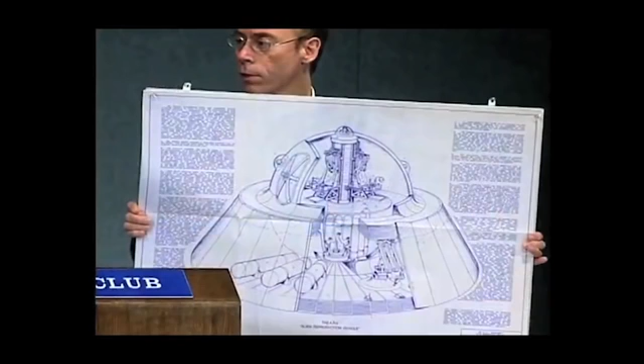He'd spent over a decade in research and development on the main focus of the NPC event, technologies connected to UFOs and extraterrestrial vehicles. His detailed technical illustration of a purportedly reverse-engineered alien craft, the Flux Liner, a strange flying disc shown at a secret US Air Force air show in 1988, was a highlight of the conference.

These discs were hovering off the floor without any visible means of support. They were referred to as alien reproduction vehicles, also nicknamed the Flux Liner because they used high voltage electricity.

This is a diagram that I made based on a sketch that Brad Sorensen did for me in rough form, and subsequently cleaned that drawing up and made it much more accurate.

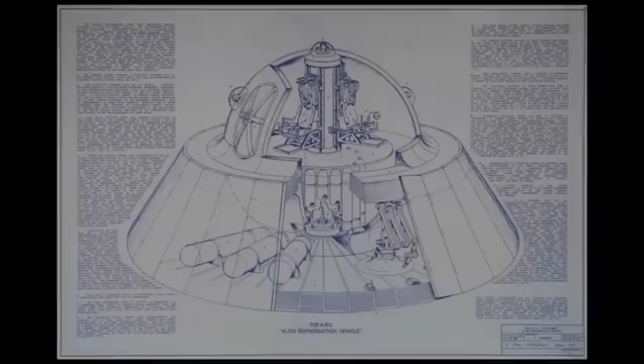This is his story. He says, you know, I gave you the basic verbal description of what I saw. He says, but somehow or other you've taken everything, all the information I gave you, and you have graphically interpreted it into an image that is so close and so accurate. He said, this is really dangerous stuff here.

Deanne Divis with United Press International: Could you please address the vehicle that there was a drawing displayed of? Why would this vehicle be on display at an air show? What is the power source that you are asserting is going to be so very useful? And how can you determine that this vehicle is not something that is being developed by a government agency?

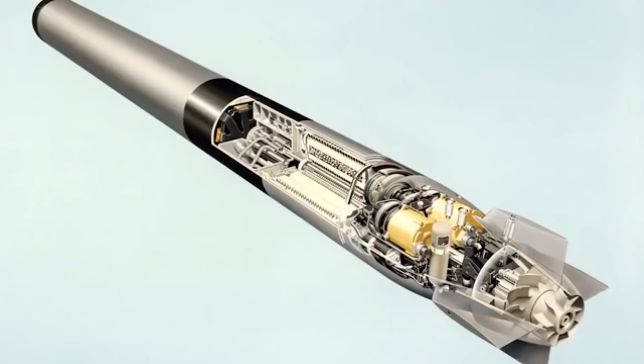Worked on some conceptual artwork showing cutaways of some of the weapon systems and how the components inside those weapon systems interrelated to one another.

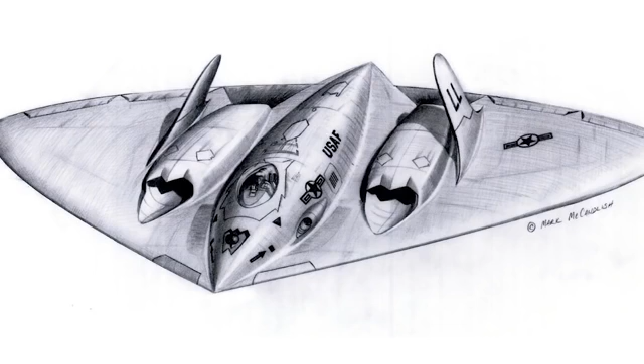I was given a lot of information. Many times I was asked to create illustrations for clients based on just verbal descriptions of what they wanted to see, because a lot of it was conceptual artwork that was supposed to put across the idea that, say, a particular aircraft they were designing was going to be extremely fast, so it had to have all the dynamic characteristics of what a really fast aircraft would have. I had an idea of what these things looked like, so I was subscribing to some of the trade publications available at that time, like Aviation Week and Space Technology, and knew a lot of people at the magazines, test pilots, editors, and things.

By the mid-1980s, he was a very successful professional artist living in Rialto, California. He had a full slate of high-profile projects and had become a very sought-after and respected talent in a very crowded field of designers and artists. Despite living in the era of Reagan and disco, things were going very well for Mark.

Then, in the autumn of 1988, things took a turn for the weird.

Well, it turns out that this was in October that the magazine hit the newsstand. It was a November issue of Popular Science. It was called the Mach 5 Spy Plane.

And a friend of mine from college, Brad, had seen this cover illustration and had opened it up to read the story, and he recognized my name, and he called the art director. He passed along my phone number, and the next thing you know, I get a phone call, and this fellow calls up and says, 'Hi Mark, it's Brad, remember me?' And I said, 'Yeah, we were in the transportation design curriculum at Arts Center in Pasadena when we studied car design.' So we got reacquainted, had lunch together, and it turned out that just a few weeks beyond that,

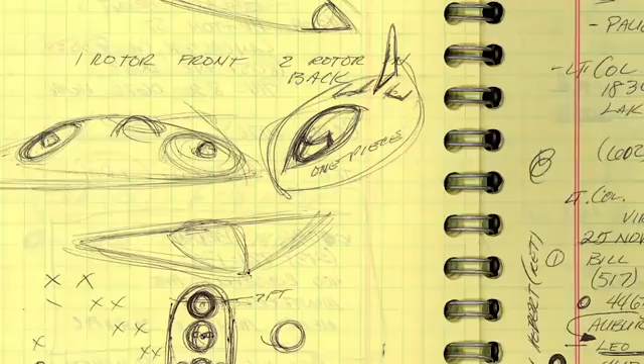Of course I was curious about what it looked like, and he gave me some details on that. Then he described a number of odd-looking hovercraft and troop transporters - basically jazzed up, advanced hover vehicles of one kind or another. After going through all this, I said, 'Well, even this doesn't sound all that extraordinary. Is there something else?' And he says, 'Well, yeah.'

He says after the main little dog and pony show, they pulled back the curtain, and there were these three flying saucers hovering there. I couldn't believe my ears. I said, 'No, wait, did you say flying saucers?' He said, 'Yes.' And I said, 'Well, what do they look like?'

He says, 'Well, it was just - it looked like something from the 1950s, like a jello bowl, flat on the bottom, sloping sides, a little terrace around the middle, then a dome on top with all these little bubbles around it, and a door that looked like something off of a submarine, with little pins that go out into the frame of the door, and the big wheel you turn to tighten it, all this kind of stuff.'

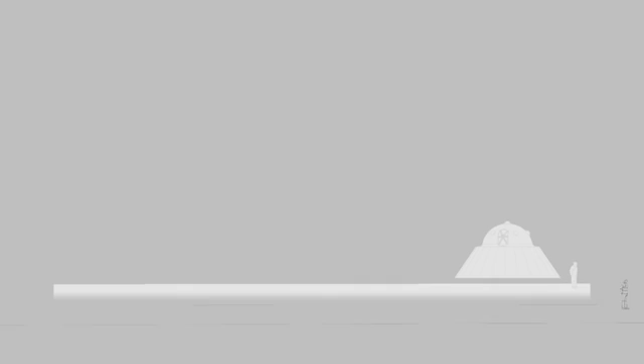The smallest one was about 24 feet in diameter at the bottom end of the craft. The medium-sized vehicle was about 60 feet in diameter, and the largest was somewhere between 125 and 130 feet in diameter. I said, 'Well, what were they doing, were they just sitting on the floor?' He says, 'No, they were hovering - there was no landing gear, nothing holding them up, no cables, they were just hovering.'

There was a 3-star general that was part of the presentation. When they pulled back the curtains and these three flying saucers were revealed to the audience that had been brought there to this hangar, this general got up and he was describing these vehicles.

He described them as alien reproduction vehicles, ARV for short. They also had a nickname for the aircraft - they called them flux liners. Now flux is an electrical term for a high electrical charge, so a high electrical charge liner, a flux liner. At that point he got kind of scared and stopped talking.

So I said, well, let's have lunch. He was nervous about talking about it on the phone, so I go over there and we start talking. And as he's describing this stuff, he's describing the different features that he had seen.

And I said, how do you know that? If you could just look at the outside of the vehicle, how do you know what the inner workings is? He says, well, they had taken some of the panels off the outside so you could see the inside, what the components looked like. And he said it was remarkably simple. There wasn't that much to it.

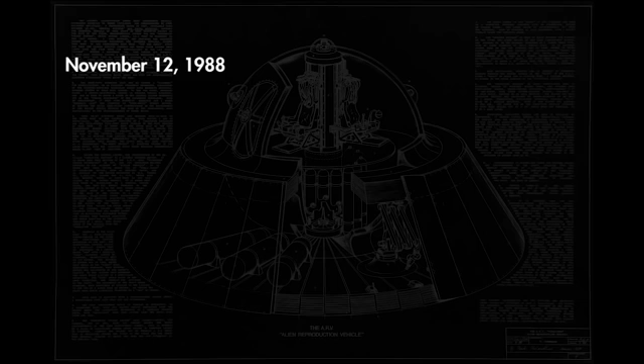According to his account, on November 12, 1988, Mark's friend inadvertently gained access to a highly classified airshow where the featured hardware was real flying saucers. They were really strange looking, but appeared functional, and were named to suggest anti-gravity and reverse-engineered alien technology. An official presenter stated they could travel faster than light. Despite their futuristic performance capabilities, these appeared to be stripped-down, road-worn working prototypes, which had seen practical operation for years.

If this were the case, they were crude but tangible proof of concept for a staggering leap in aviation technology. They used extremely advanced electromagnetic or field propulsion, as opposed to solid or jet fuel, nuclear power, or any other commonly known conventional means. It also meant our government, and at least one other major defense contractor, Lockheed Martin, had been developing and deploying functional systems along these lines for many years.

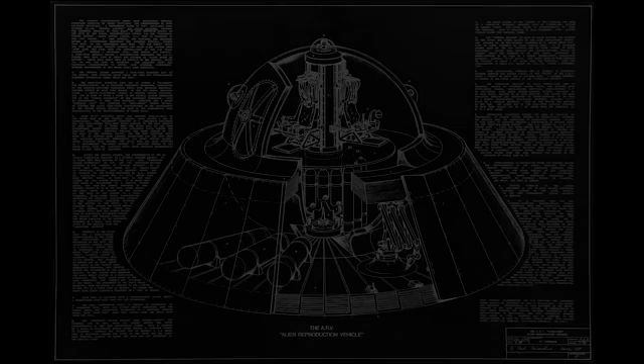To both McCandlish and Brad, who'd been working professionally for some time within what they thought were the highest levels of aeronautical design, this odd system was a sucker punch from the future. This apparently had a really serious impact on Brad, and he seemed kind of stunned by what he had seen.

So we got together for lunch, and I was doing idea sketches of what he described to me about how the components related. And I had your stereotypical sort of lens-shaped flying saucer, like you see in more modern movies and stuff.

And he said, oh no, this is real simple. It's flat on the bottom, sloping sides like a section taken out of a cone, a little ledge, and then a dome on the top. He said the dome is actually the top half of a crew compartment that's like a big ball.

I'm pretty sure that was about 12 feet in diameter. There's a central column that goes down through the middle. There's a flywheel thing on it, maybe 6 to 9 feet in diameter. There's 4 ejection seats that are all back to back on this central column above the flywheel type thing. And he says a bunch of oxygen tanks in there, all around the bottom. And he said the bottom is this huge capacitor array, probably maybe 12 to 14 inches thick.

It was shaved off at an angle on the edges, like it had been put on a big giant milling machine, and they milled off the edges at a 35-degree angle. He said there's a series of these plate capacitors.

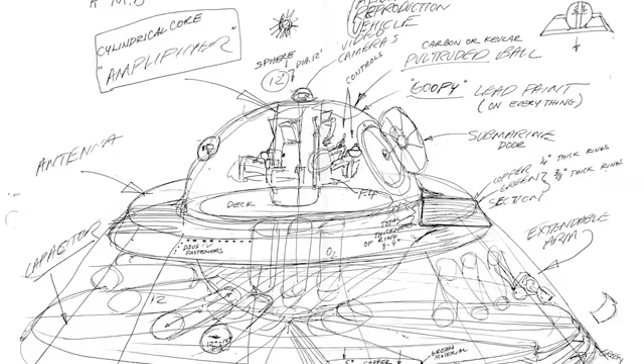He put some little handwritten call-outs around the edges that described the number of capacitor plates in each one of the little sections, that they were so wide at the end, and the crew compartment was definitely about 12 feet in diameter. He just put all these things down as close as he could remember to the way they existed.

And so I sat down with all this information, and I just began sort of drafting it out.

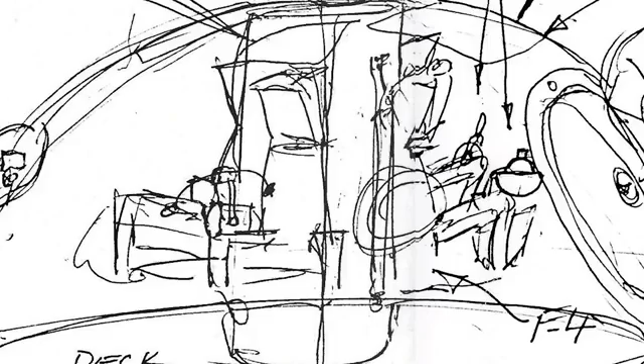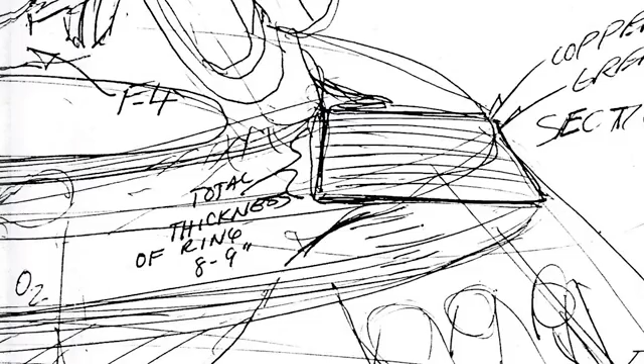It was at this point Mark began putting his formidable skills as a conceptual illustrator to work in uncharted territory. Taking Brad's eyewitness account, detailed descriptions, and rough sketches of the ARV, McCandlish began refining aspects of the components his friend described and piecing together an ever more precise rendition of the craft.

Over the course of the next few years, he generated a series of drawings, culminating in the Fluxliner cutaway blueprint, one of the most notorious images in the history of ufology, and the mysterious realm of black-budget aircraft.

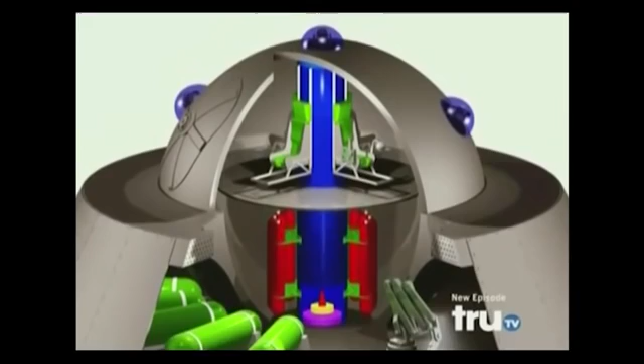This was called the Fluxliner. This is probably the strangest one you've shown me yet. This actually flies? It actually flies on the principles of high voltage electrical charges.

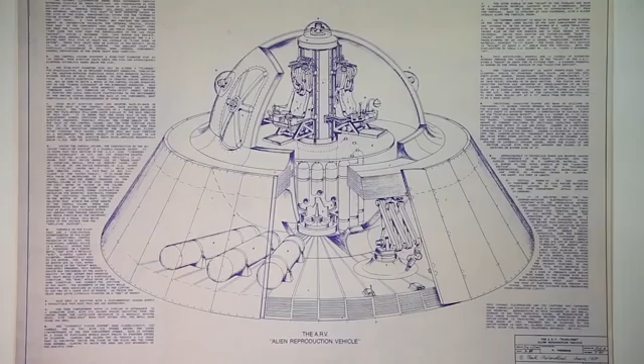This is the original, one of the original blueprints of the alien reproduction vehicle, which I produced in March of 1989. It was put together by accumulating a lot of verbal testimony from Brad and later from a number of other sources, including Kent Sellen and some other people I talked to who had some contact or information about the vehicle.

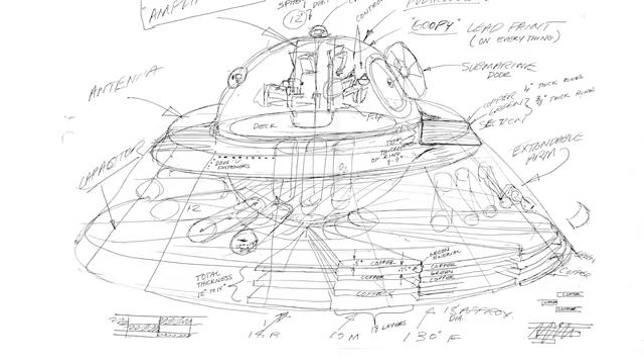For Mark, his friend Brad's initial account was a fascinating story with a degree of veracity and plausibility, worth exploring and doing some research, but was after all just one man's tale of a fairly unbelievable event, concept, and machine.

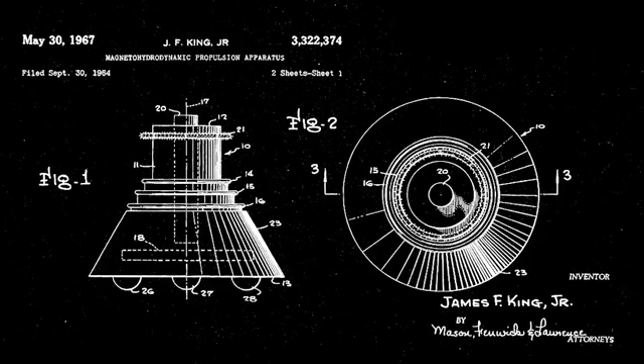However, this subsequent research led Mark to some other very compelling eyewitnesses, official documentation, including numerous scientific patents, and other sources, such as respected quantum physicists, which finally convinced him of the likelihood that the ARV might be a very real thing.

The first verification of the story I picked up on the alien reproduction vehicle was around 1991, 1992. It was the first air show at Edwards Air Force Base where they actually had the B-2 stealth bomber on display. In the course of that air show, I had occasion to join up with some clients from Rockwell International, and they introduced me to this fellow who claimed at the time that he was working with the Air Intelligence Agency. His name was Kent Sellen.

He claimed that he had inadvertently seen this same craft at Edwards Air Force Base North Base facility in 1973. I asked him, when, how, where, what were the circumstances? He said, well, I was a crew chief. I worked on Bill Scott's plane when he was a test pilot. One night my shift supervisor said to me, go out to North Base. They've got a power unit out there, a ground power unit for an aircraft that's leaking or failed or something, so we need to take a tow vehicle out there, go pick it up, bring it back.

Well, instead, what happened is he comes up off the dry lake bed, rolls right up on the tarmac, and is going down these rows of hangars. They're all Quonset-style hangars back then. He stops in front of the first one with the doors cracked, expecting to find this defective ground power unit, and what does he see? He sees this flying saucer sitting in the hangar, hovering off the ground.

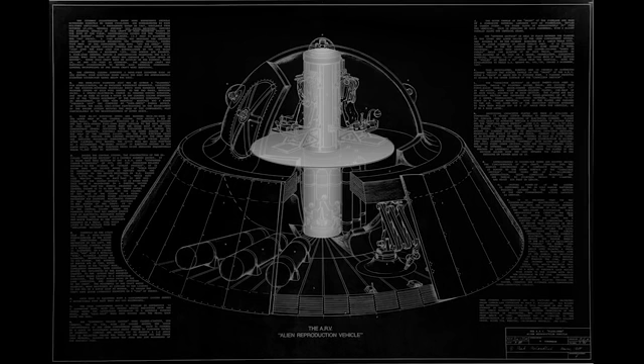Strong and durable must the body of the Vimana be made, like a great flying bird of light material. Inside, one must put the Mercury engine, with its iron heating apparatus underneath. By means of the power latent in the Mercury, which sets the driving whirlwind in motion, a man sitting inside may travel a great distance in the sky.

One of the things that they described when you read up on the literature surrounding these so-called Vimanas was the so-called Mercury vortex or Mercury turbine engine. I see the word Vimana. Can you describe how that relates?

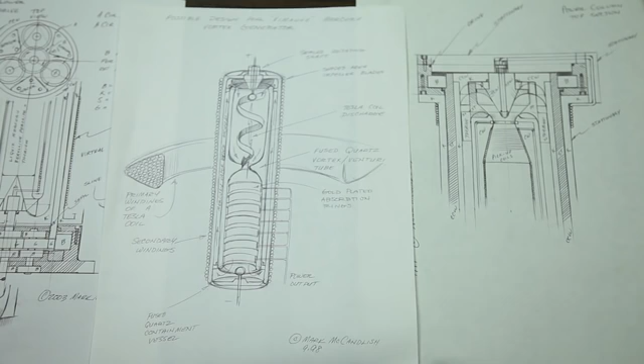Well, this is something that I spent a lot of time reading up about, the so-called Mercury turbine generators or Mercury vortex generators described in some of these ancient Sanskrit texts. I started looking at the possibility that there had to be some kind of circulation going on in the Mercury itself. That's the kind of thing I visualized would be going on inside the chamber. The central column has a number of components, a couple of counter-rotating cylinders.

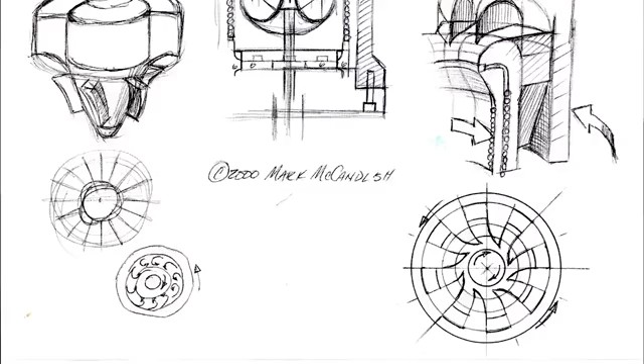It sounds very much like the device that the Nazis were developing in the Wenceslas mine in Poland towards the end of the Second World War. There seems to be some evidence that they were trying to develop some kind of anti-gravity propulsion system or a zero-point energy device. If we're talking about systems using components and processes similar to the ARV, we can't ignore the Nazis. I think it was Timothy Good

who published a story, maybe in Above Top Secret, where he found a researcher who was following developments by the Nazis at the end of the Second World War, and it looked like they'd been developing flying saucers up in Poland in the Wenceslas mine. They had this thing that looked like Stonehenge, with all these high voltage cables coming into it and chains that would hold something down, and they had this thing called the bell, the Das Glocke. Die Glocke. The bell.

That was down in this mine in Wenceslas, and it involved a ceramic dome with two cylinders inside with a mercury solution circulating in it. The two cylinders were inside an electromagnetic field, counter-rotating, with this mixture of mercury, thorium, and beryllium. Now it looks like there's a high-voltage electrical discharge being sent through the mercury, and that is somehow doing something that enables this anti-gravity effect to occur.

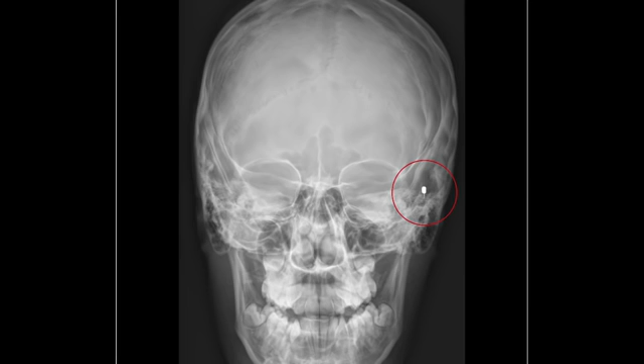So what I did was simply ask them to describe what they saw, and without disclosing anything that I already knew about the components inside the alien reproduction vehicle, I found that these young ladies, at least one of them in particular, was able to describe not only components that strongly resembled the ones inside the alien reproduction vehicle, but they were also at a higher level of sophistication that actually gave additional clues about how the ARV actually functioned.

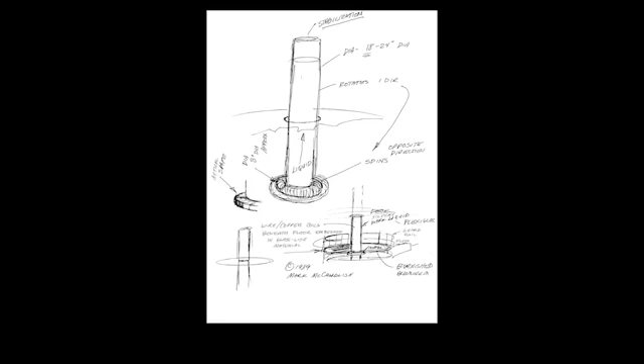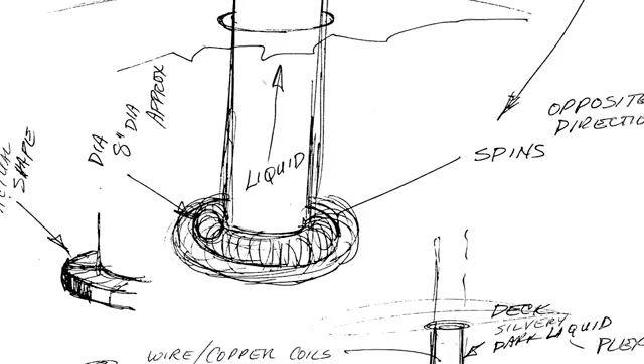Alicia Davidson described being escorted into the engine room and seeing the propulsion system components. It involved a central column made of a transparent glass-like material, with a silvery fluid spiraling upward at the bottom of the column. Down in a well in the center of the spacecraft was a little tiny flywheel-like mechanism spinning, which matched the ARV. This was at a point when she had never seen any of the drawings I'd done of what the ARV was structured like.

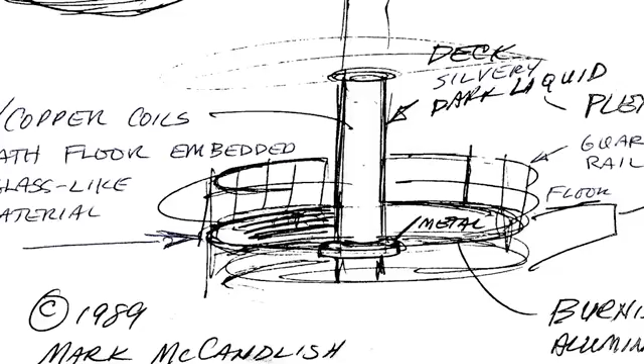I was just talking about propulsion components in general, but she said that when you looked across this little well, this lowered floor area in the center of the room, there was like a guardrail around it. She stood there and said the deck below was this glass-like material with coils of wire going through it, spaced in the same proportions as on the ARV. The most significant thing was that the column itself was rotating in one direction, and the flywheel was spinning in the opposite direction. There was counter-rotation, which is often reported in UFO sightings—components spinning in opposite directions.

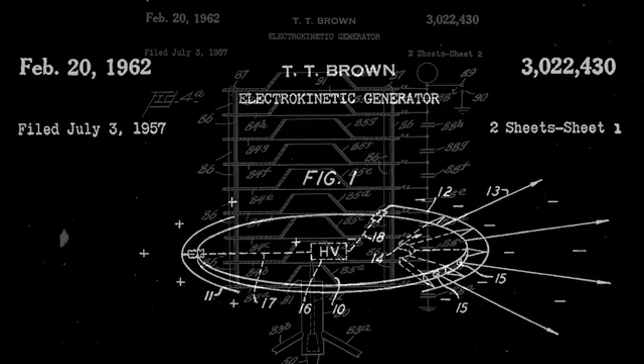Back here on Earth, the scientific community has been busy since the end of the Industrial Revolution. There have been dozens, perhaps hundreds, of US and international patents dealing directly with electrokinetics and electrogravitics, going back to the turn of the last century. It would be safe to assume private industry and the military have also been working on related applications off the public record. In short, since Nikola Tesla's first experiments with pushing electricity around, mankind has had a thing for anti-gravity.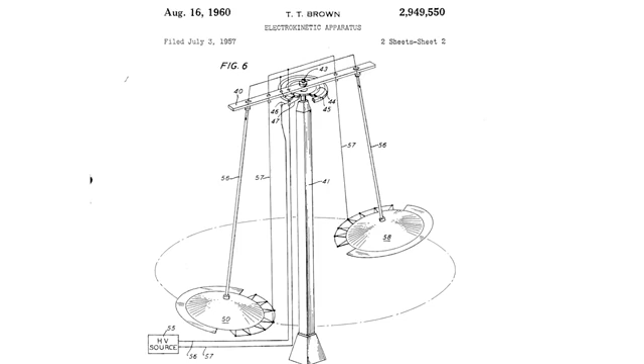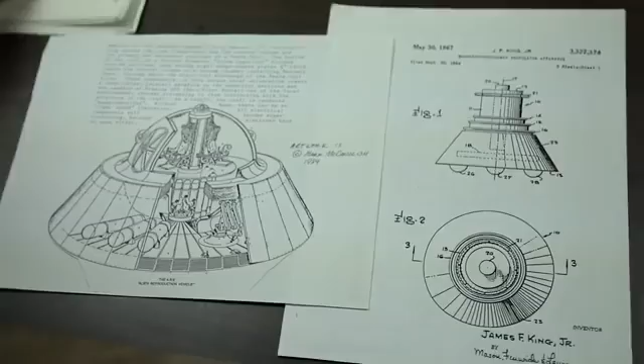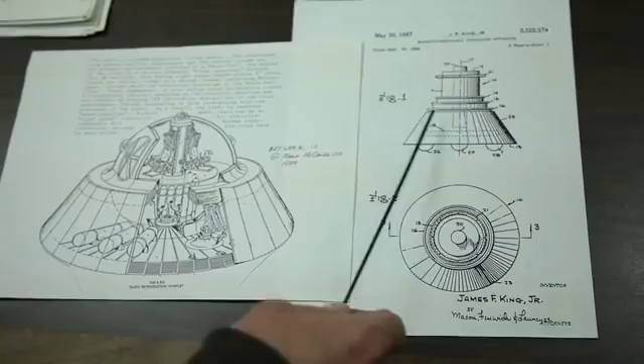If you look at these two illustrations, this is a patent secured on May 30th, 1967 by James Frank King Jr., who worked with Thomas Townsend Brown in the labs of Agnew Bahnson. You can see a striking similarity between the two vehicles: a frustrum-shaped fuselage section, a series of coils wrapping around the crew compartment—though here it's more of a cylinder—a central column going down through the middle, a capacitor section at the bottom, and little flight control mechanisms. I find it remarkable how much similarity there is between the two objects.

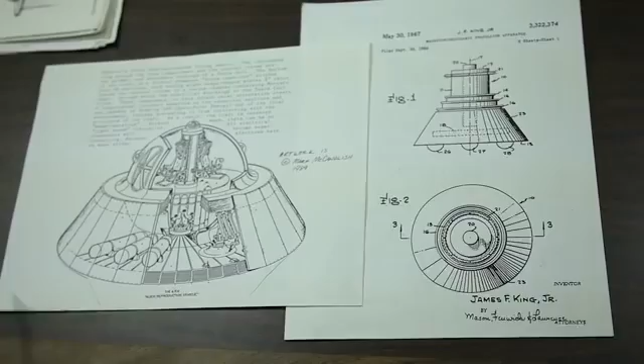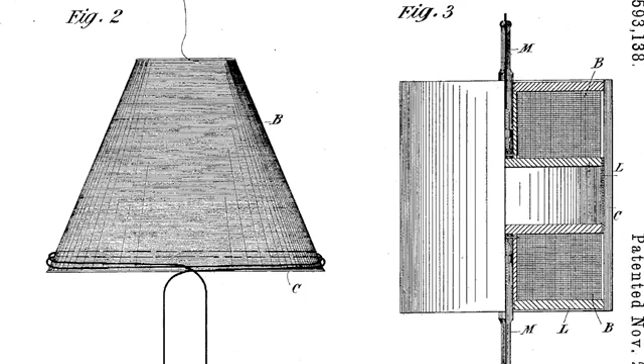And when is that patent from? May 30th, 1967. It's called a magneto-hydrodynamic propulsion apparatus. So I started thinking, maybe it's like a cyclotron, maybe there's an electrical discharge from this. Basically this whole thing looks like a giant Tesla coil—it's got the capacitor array, it's got a central column that looks like the secondary windings of a Tesla coil. This might even go back to something Nikola Tesla discovered back in the 1890s that was hushed up, and all the UFO sightings we've ever seen were something that came from Tesla and not from another planet. These are the things going through my head at the time.

It was really surprising to find all the different sources I encountered that seemed to provide useful information as to how this thing was made, how it worked, what its energy sources were. It was all really fascinating to me, and that's one of the reasons I pursued it. It wasn't because I was trying to breach national security—I was just insatiably curious about how these things work.

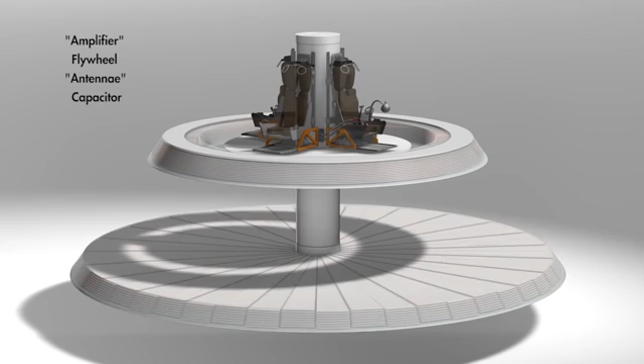And he said it was remarkably simple—there wasn't that much to it. The ARV system, for all its claims of flashy, out-of-this-world propulsion capabilities, was indeed remarkably simple. It could be described as a large-scale, souped-up Tesla coil, designed to negate gravity and inertia, with off-the-shelf navigation and life support systems bolted on almost as an afterthought. You could think of it as the Model T of anti-gravity vehicles, an industrial dune buggy or crude hot rod that can get you to Mars in a few minutes. In this version at least, first-class seating was still a way off.

From everything I've been able to gather, it helps to understand what some of the components are. There's a large capacitor array on the bottom of the craft. In the smallest version, it's 24 feet in diameter. The outer edge of the plates and the capacitor section itself are shaved off at that same 35-degree angle, so you have a series of plates that are progressively smaller as you get higher in the stack. There's 48 sections all set up like that.

Through the middle of the crew compartment is a central column called the amplifier section. At the very center point of that column is what looks like a large 9-foot diameter flywheel-type mechanism. Around the belt line of the crew compartment is about a 2-foot wide coil of wire embedded in the same glass-like material that the capacitor plates are embedded in.

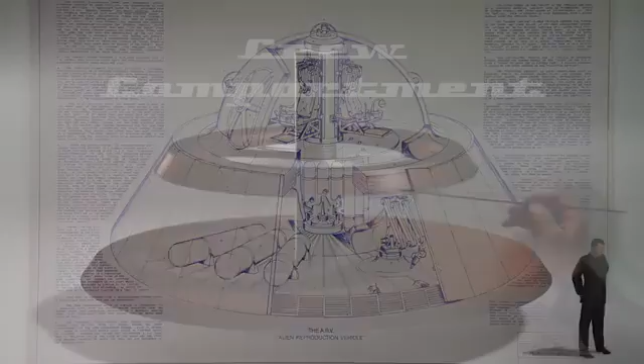There's a kind of flange or fairing that traps the top and bottom surfaces of the coil. You can see it traps it there and at the top, but in between are a series of explosive bolts that run all the way around the craft.

Above this ledge there's what looks like a door out of your stereotypical cartoon submarine. It has a steel frame embedded in the side of this protruded sphere that makes up the crew compartment. It had a wheel on it with little spokes, like an old Captain Nemo submarine, with pins that would go out and lock into the door frame. It had a seal on it so it'd be airtight.

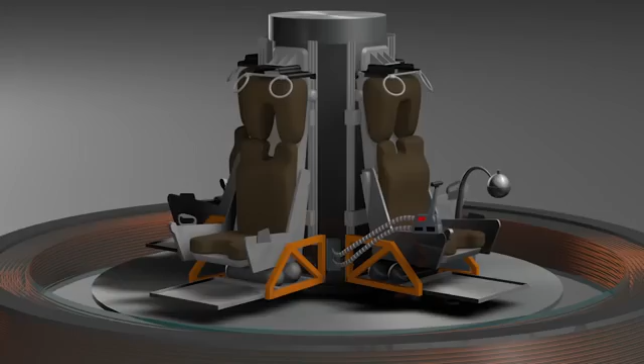The ejection seats are mounted back to back. There's 4 of them in the smallest version of the craft, mounted on this central column on a set of rails. In the event of an ejection, the explosive bolts separate the top and bottom halves of the crew compartment, and the entire outer sheath of the central column pulls away along with the upper half of the crew compartment and the ejection seats.

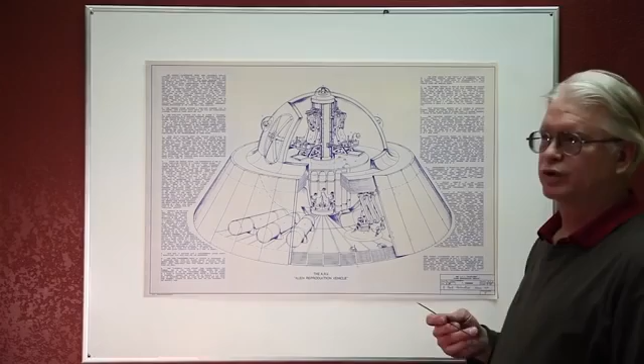This crew compartment sphere can actually function as a rudimentary re-entry vehicle coming down through the atmosphere. Once you get below about 14, 15, 16,000 feet, it will pop a chute out the top, and the ejection seats drop off on these rails one by one, and the pilot can drift down with a parachute. Because this flywheel-like mechanism is turning all the time, each pilot or crew member has a kind of pan right below the front of the ejection seat that affords them a place to put their feet.

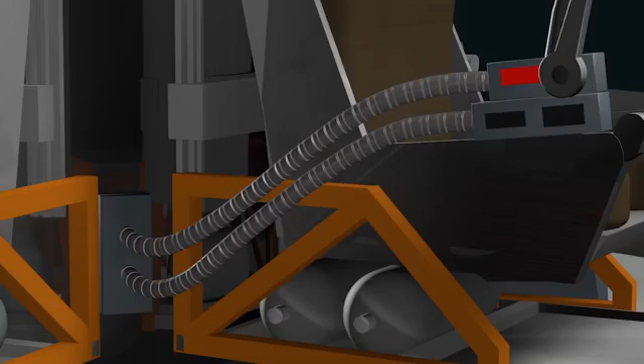Now the control system on the ejection seat the pilot sits in—on the one hand it looks like a high voltage potentiometer, or a rheostat, on one side, with a couple of big heavy-duty cables that come out of it and go into the central column. That's basically the amount of power he has in the system.

On the other side there was sort of an inverted J-shaped piece of metal that came up and over like that, with a sphere on it. On the bottom of the sphere there's a sort of bowl that's slightly larger in diameter, but conforms to the shape of the sphere.

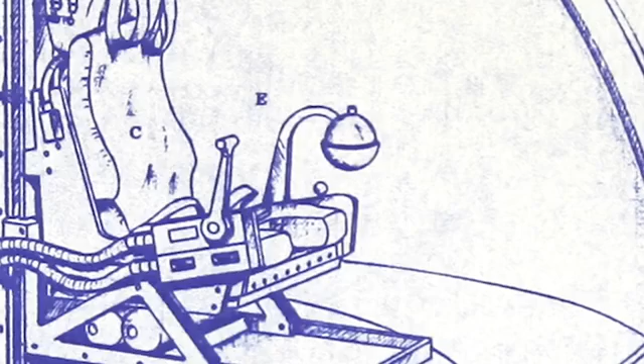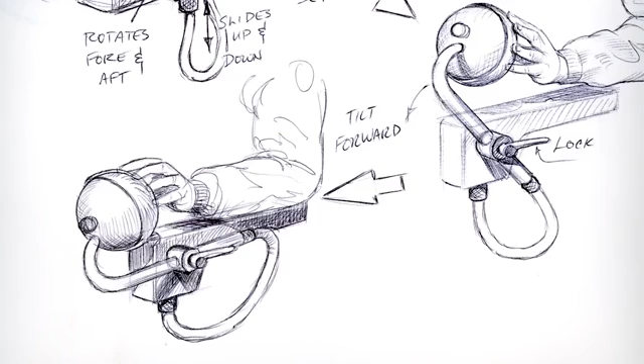Of all the components of the ARV, the navigation system, while perfectly logical and even elegant in its design, has to be the strangest one. It's an entirely unknown paradigm in steering an aircraft or anything else, yet it makes perfect technical sense. If one were to make the case for truly alien aspects of the alien reproduction vehicle, this might be the first example they'd use.

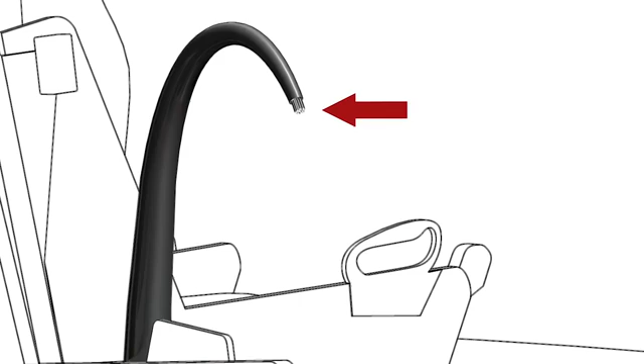The sphere itself appears to be a kind of domed arrangement where you have a number of fiber optic leads that come into the sphere, and for each one of the 48 capacitor arrays there's a series of sensors that are then used to relay information to the individual plates.

On the bottom of this you have a bowl that moves around and can be used to convey the commands of the pilot in terms of what he wants to do in shaping the field around the vehicle. Right in the center of that bowl is a kind of laser diode that sends a laser beam up into the underside, the inside of this sphere.

As the bowl moves, that laser is sort of scanning around on the inside of the different sensors that are responsible for each of the capacitor sections. Then there's a series of relays that'll open up and close and let a certain amount of energy in, or prevent it from going in. When it's dead center, it means all of them get the exact same amount of information, so you just go straight up. If you want to bank to the right, you bank this to the right, and it sends the laser signal over to the opposite side of the dome, and the opposite side of the craft is going to get more energy, so it banks in that direction.

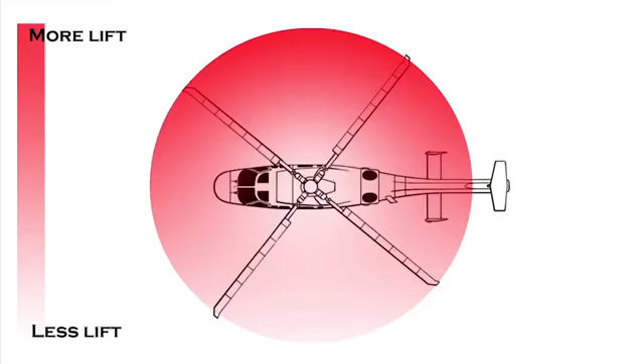It's kind of like in a helicopter, in the swash plate of a helicopter. When you want to bank to the left, you create more deflection in the main rotor on the right side so that it begins to bank to the left. So it's kind of the same principle.

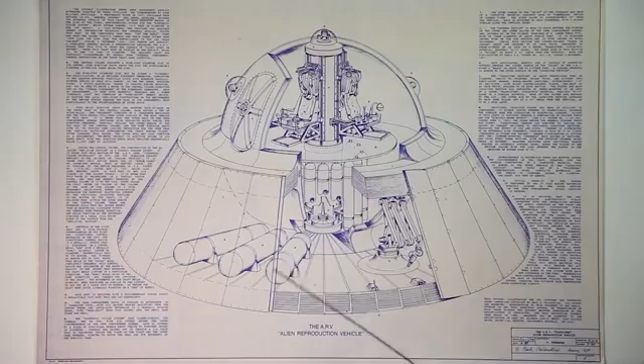Then you have an oxygen supply that's strapped to the lower part of the central column down in the lower part of the crew compartment. You have a much larger set of oxygen tanks, and these are all pultruded vessels, by the way - there's no steel or aluminum in terms of the oxygen supply in the vehicle. There was also a pair of oxygen tanks under the seat, assuming that maybe you had to eject when you're at 25 or 30,000 feet, and you needed some air to get you from up there down to the place where you'd actually be able to breathe ambient air.

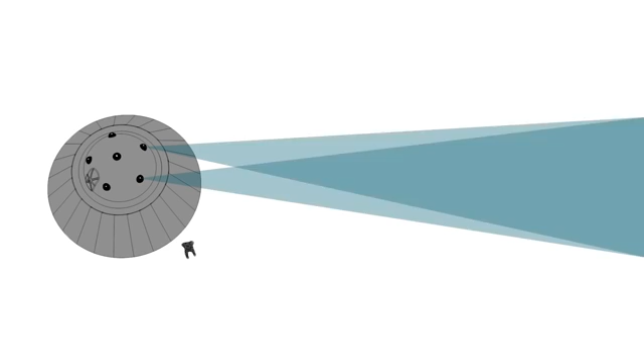I said, well, were there windows? And no, there weren't any. He said there was a thing called a synthetic vision system - 6 or 7 little plastic bubbles around the top of this thing, one on the very top in the center, and then maybe 6 around halfway up from the ledge to the very top, spaced at even distances. In each one there was a little CCD camera. So the synthetic vision system was set up so they would take 2 cameras with a converging point of focus, so it would be like looking through a set of binoculars.

So you'd have a left and a right eye view, giving a 3-dimensional view outside the vehicle, but with no windows. The reason for that, apparently, was that this aircraft was using extremely high voltages, and the voltages would ionize the air around the vehicle so much that it would start producing X-ray photons, which are absolutely lethal. So you have to have basically a barrier to protect yourself.

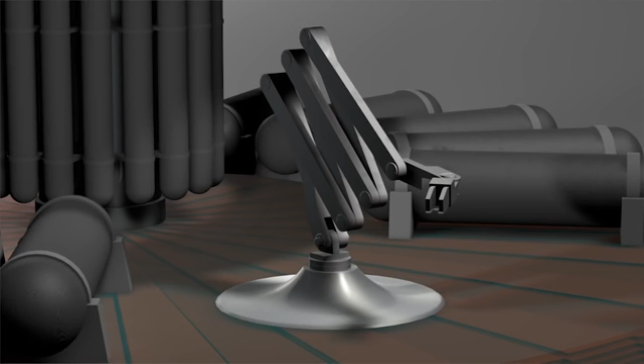You also have a robotic arm that seems to be blended in with a composite fairing sitting right on the top surface of the capacitor array, with the ability to extend outward with a little air-driven claw on the end of it. I think the craft's magnetic field or electromagnetic field is probably so powerful that conventional little electric motors probably wouldn't work in this kind of application.

Where they took the panels off the side of the aircraft, they had Dzus fasteners - these little quick spin lock things that they put on there to hold the panels. The panels are all like a fiberglass material, it's all composite.

The entire vehicle appeared to be covered with what he referred to as a goopy lead paint. It looked like little flecks of lead suspended in kind of a resin, just painted haphazardly over the outside of everything on the vehicle, with the possible exception of the door itself and these little blisters that house the synthetic vision system.

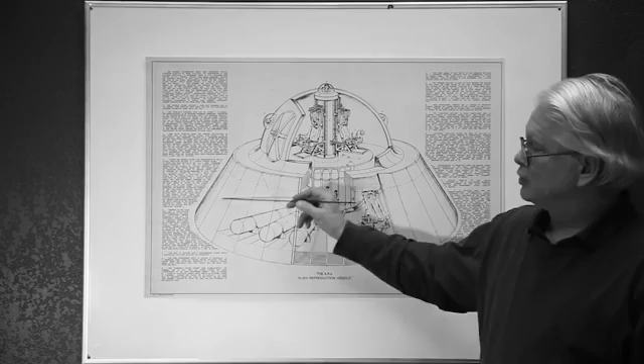So why would it be goopy lead paint? Well, the theory is that the electrostatic field created by this huge capacitor array, and the ionization that occurs just because of the propulsion system, might be enough to create a level of ionization around the craft that's high enough that it would produce X-ray photons of its own accord. So you would want to be able to protect the pilot and crew members from that radiation.

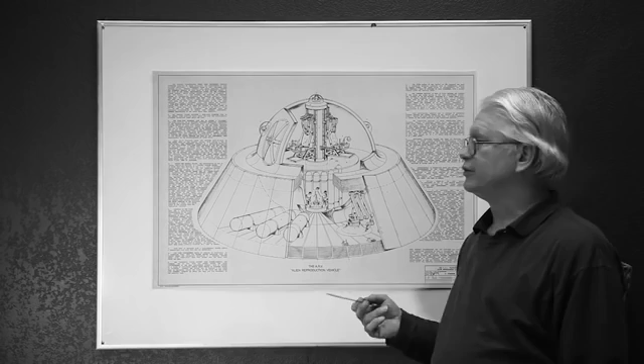So anyway, that's the general overview of the structure of the vehicle. This is a vehicle that has the ability to travel up to or beyond the speed of light. Part of the reason it's able to do that is because it exploits the energy form embedded in space-time that's responsible for the effects of mass and inertia.

So here we have a configuration of various components, creating a system that's somehow capable of producing and maintaining an insane amount of energy in a concentrated field around the vehicle. This field can be precisely controlled by the pilot with the aid of a basic throttle, an alien steering ball, and a bunch of casino cameras. There's plenty of onboard oxygen, handy if you're off the planet, and a lead coating so the occupants don't get fried in their seats, and a robot arm in case you need a robot arm somewhere.

It looks like a big clumsy diving bell from 1905, but apparently works like a helicopter you can take past light speed. Its beauty and elegance lie in the propulsion system, maybe a really fast one that gets around currently accepted physics, one we commonly associate with UFOs.

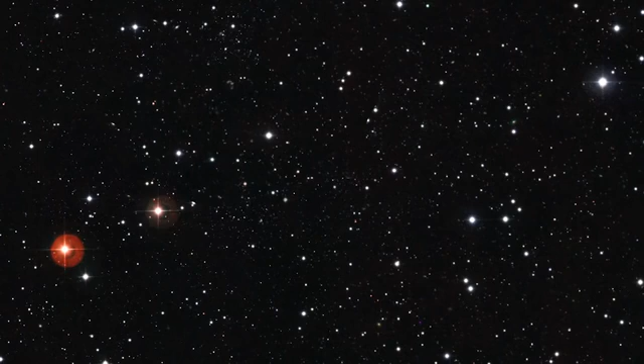For anybody who has followed the work of Einstein or just basic physics, one of the sort of inviolable rules of physics is that there's no material object that can actually go faster than the speed of light.

So somehow or other, and I'm not saying we got this from aliens, but they did call it the alien reproduction vehicle. Somehow or other, this simple system that Brad described in these diagrams was able to do this.

So I began looking at the scientific literature. I was looking at this scalar energy, anything I could find on zero-point energy, scalar energy, quantum zero-point fluctuations of the vacuum, I think is the more technical physics term they use in the literature. And it turned out that there really were scientific papers being published by a number of different scientists.

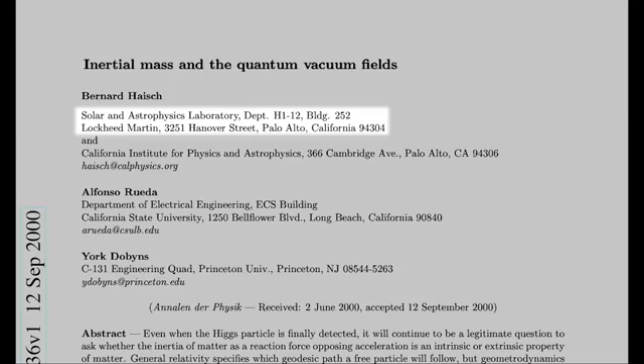Hal Puthoff, Bernard Haisch, Alfonso Rueda, who just happened to work at Lockheed Skunk Works, by the way. So I started noticing the names and where they worked and what they were publishing. And it occurred to me that maybe these are people who have some insider knowledge. So I started looking at that.

I started looking at the things that Hal Puthoff had said. In the middle of last century, physicists made an astounding discovery, and that is what we ordinarily consider empty space isn't empty at all. Even if you go to the far reaches of outer space, it turns out that rather than emptiness, what we call the vacuum is really a seething cauldron of what we call quantum energy, or zero-point energy.

Zero-point just simply means that even if you froze the entire universe down to absolute zero, froze out all motion, where everything would be as quiet as you could possibly get it, this energy is still there. It was predicted by the mathematics of quantum theory, but the numbers were so large - for example, there's enough energy in the volume of a coffee cup to evaporate the world's oceans - it was thought, well, this must be some kind of artifact of the theory. But as time went on, various predictions in quantum theory were verified in the laboratory, and it finally turned out we had to take these numbers seriously.

So I opened up a correspondence with Hal Puthoff, and he was very gracious in taking time to talk to me on the phone, send me copies of the peer-reviewed papers that he had published in Physical Review, Physical Review A, Physical Review B. I couldn't understand the mathematics with all these Greek symbols - it was really advanced theoretical stuff. But what I was able to follow were the paragraphs before and after the equations that explained what all the math was talking about.

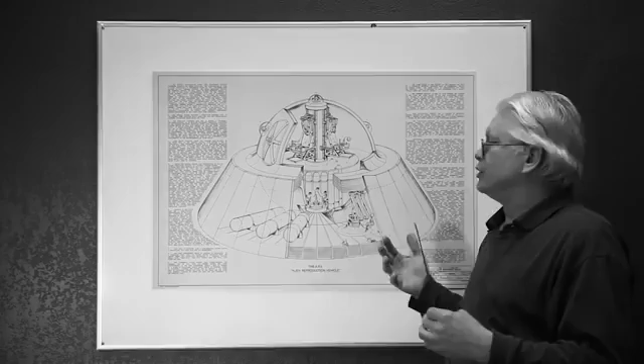You're drawing energy from the environment, and in doing that, you're enabling the craft to not only demass itself, but conserve energy by using the flux in the vacuum of space-time as a power source for your propulsion system. So literally, the faster you go, the more energy you have available to convert into propulsive force, and the lower the relative mass of the vehicle becomes. It's actually an inversely proportional kind of relationship.

Most scientists, with an instant response, would think in special relativity terms and say the velocity of light is a limitation—you can't go faster than the speed of light. And therefore, to conceive of us exploring stars, or other people coming here, it's too far. They just can't get from here to there. We might explore our own solar system, but that's probably as far as we're going to get.

But the truth of the matter is that in general relativity, that's not the case. There are options there. That limitation has begun to evaporate due to the new understandings and predictions coming out of general relativity. So that's not the issue.

So I was starting to learn about the technology and how it might be playing a role in the function of this craft. The craft, of course, had oxygen tanks and stuff in it, which really suggested that the thing was capable of going out into space. So the idea was that somehow this vehicle is able to skirt the law in a way that allows it to do these things that are unheard of.

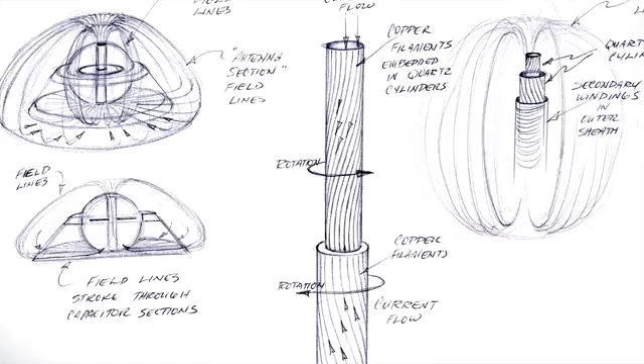The mercury, based on a number of accounts, appears to circulate in a kind of closed loop system that runs down through the cylinder in the middle and then back up in the space between the inner cylinder and the outer cylinder. There's a counter-rotation kind of mechanism occurring there too, and at the midpoint is this thing that looks like a flywheel.

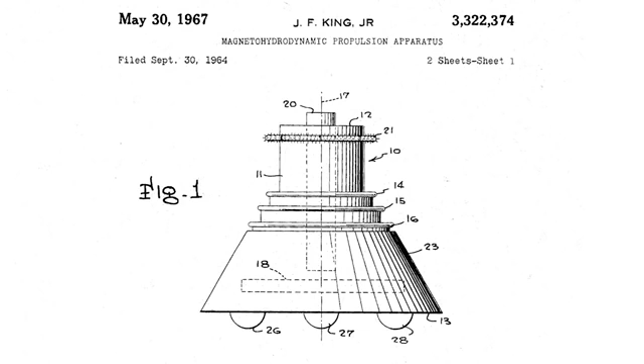But in effect, what I think its actual function is, is similar to what's called a homopolar generator, where you can use the centrifugal forces of a spinning conducting metal disc to actually throw the electrons in the material out to the edge, where they can be literally tapped off with something that looks like a brush with conductive bristles. Now, I believe that this vehicle develops probably several million volts of voltage.

And the sheer power of the electrostatic field that is created in this capacitor array actually has the ability to polarize the surrounding space-time, and it polarizes the so-called zero-point energy that is embedded in the space-time. So it creates a kind of positive and negative aspect to the status of that zero-point energy surrounding the vehicle.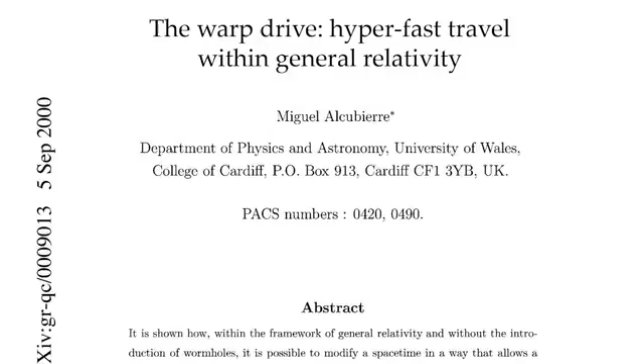So just to give a little background, the idea of a space warp works on the principle of expanding and contracting space in such a way that allows you to go somewhere very, very quickly. What this leads to is something described by Alcubierre in his 1994 paper on warp drive—the creation of a warp drive that would not violate general relativity.

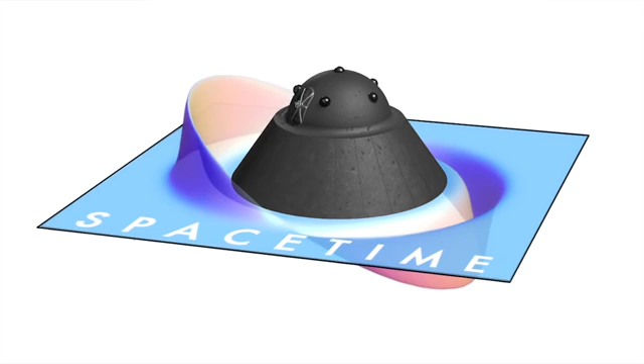One of the things he was suggesting was that you would be able to engineer a vector or a pair of vectors in space-time that would cause a compression of space-time ahead of the vehicle and an expansion of space-time behind it, with an intervening space between those two phenomena that would pretty much peg your sense of gravity and inertia to the environment you departed from when you initiated this movement.

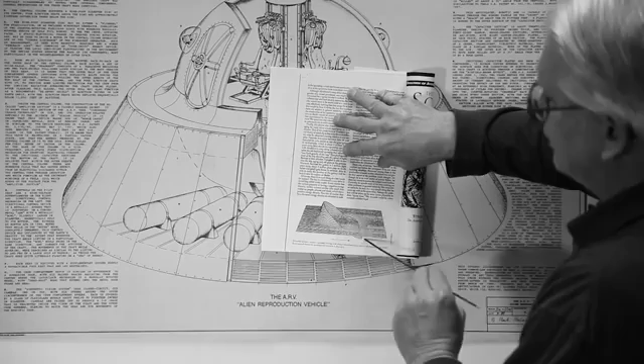So in essence, what you have is a spherical event horizon around this particular region that might be called a dynamically engineered local space-time. This region is set up in such a way that it creates these influences in the surrounding metric, and also creates a vector that goes in this direction.

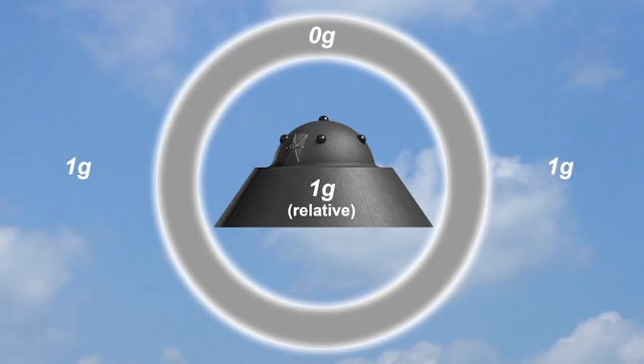So it's kind of like having a black hole ahead of you and an expansion of space-time behind you. But the actual environmental conditions you experience inside the spacecraft are pretty much pegged to the time and place you started out from.

So you don't have any sense of g-forces or being moved around, any sense of acceleration, because the entire pocket of space-time you're encapsulated in is being accelerated by the vectors created around the system. It's uniformly accelerated — the space-time pocket, the vehicle, the crew, the cargo, everything moves as one complete package, so there's no sense of acceleration.

But what it allows for, according to Alcubierre's calculations, is an arbitrarily large speed, suggesting something in excess of the speed of light — superluminal speeds. So to the person inside the vehicle, it may appear that you begin to accelerate away from a particular location, but to someone standing outside the disturbed region of space-time, it looks as though you just were gone, in an instant.

So this is an ARV, isn't that what it's called? That's what some people call it. We call it RAM — Replication Alien Machine.

Oh, I see. Many highly credible reports of UFOs share a few key descriptions of how these crafts behave. They appear able to accelerate to extremely high velocities at will, far faster than any man-made craft, as if the speed of light isn't any big deal. They can stop on a dime and turn at random angles while traveling at these crazy speeds, like the forces of mass and inertia, which would flatten anyone in a normal situation, also aren't a problem. And they're silent, without any visible rockets, jets, or exhaust of any kind, as if they're pulling the energy they use out of thin air.

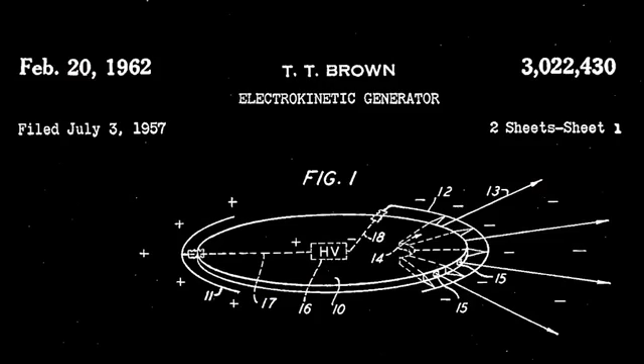Once we retrieved, back in the 30s, 40s, and 50s, several of these extraterrestrial vehicles and began to study them, we combined that knowledge with knowledge we already had. Because remember, we had people like T. Townsend Brown who were studying anti-gravity quite independently of this issue back in the 20s, 30s, and 40s. But when their information got combined with studying these spacecraft, they figured out how they're working.

And according to the latest revelations in quantum physics, all this is possible by tapping into the sea of raw energy we're all just floating around in. There's plenty of energy in the pure raw vacuum. The new physics, since quantum mechanics, shows the vacuum is a source of energy, but it's a peculiar kind of energy.

Let me explain the peculiar kind. When a bird flies in and sits on a power line, he sits at a very high potential. But between his two feet, there's no potential difference, no voltage. So even though from the line to the ground it may be 100 million volts, the little bird can sit happily with his feet on this supposed 100 million volt line, with no volts across his body. He's very happy and doesn't even know it. Let him touch one foot to the slightest thing with the slightest difference, and he'll fry to a greasy spot. Now, in the vacuum, we have the same thing — we have an extremely high potential or charge of the vacuum, but we're immersed in it.

So they were modeling the universe as being sort of this empty, material-free environment that had this energy embedded in it, almost like a fluid in a way, that it had all of this potential that you couldn't see until you found a way of driving it out of this homogeneous state of equilibrium and getting it to do usable work.

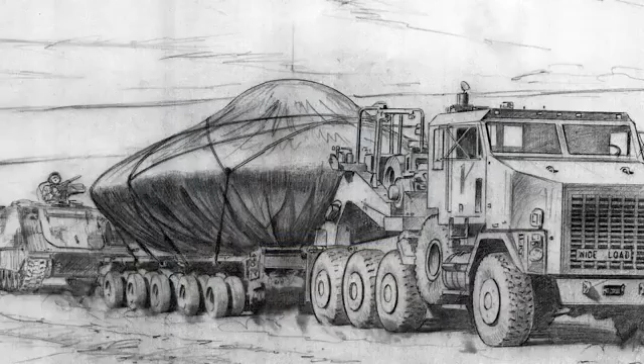The reason it's called alien reproduction vehicle is that it's based on the study of extraterrestrial vehicles, but it is manufactured by human military intelligence aerospace contracting arrangements. We have studied specifically extraterrestrial vehicles which have been retrieved. The breakthroughs in that research have led to applications that have led to the building of this and similar anti-gravity devices.

I mean, you can understand how corporations... Brad told me that it had a big impact on his life, because when his name started popping up on the internet associated with the ARV story, there were a lot of his Japanese clients that wouldn't have anything to do with him because they did not want any of that kind of reputation-tarnishing information associated with their product and their brand. So he did everything he could, and I've minimized my mentioning of his name, except where it comes to historical documentation of what's happened to him and I and other people I know.

But I feel terrible in some respects because I was encouraged by Dr. Greer to name names on camera, and I wasn't ever really sure what doing that meant in terms of protecting identities or protecting people, other than making some footnote in history that this person came forward, said something, and then whatever happened, happened. I had threats on the phone.

I had the IRS come up and take all my money, take all my cars. In fact, that's what happened to a guy in Canada. He had a machine the size of a shoebox that was supposed to put out enough power to power your home, and it was very unusual.

Well, he was very open. He would give demonstrations. He wanted some investor to give him $1 million to sell the rights, and he was doing all the wrong things. Sure, of course. And then one day they came with a SWAT team, surrounded his house, confiscated all his machines, put him in jail, and said, if you want to get out of jail, you have to sign this paper that says you'll not work in this technology any further. So the pretense of why they arrested him, they claimed that he was harboring weapons of mass destruction, terrorism weapons.

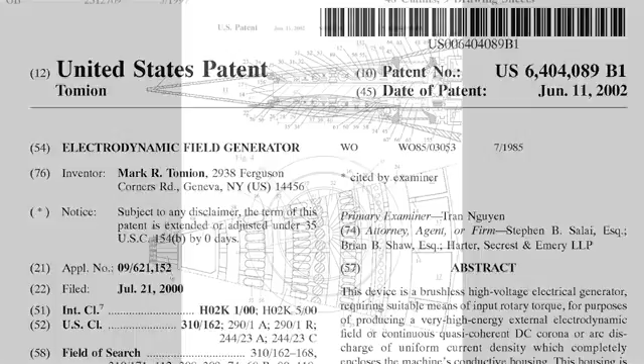Arie de Geus, an inventor of a patented revolutionary clean energy technology associated with the zero-point field, was found nearly dead in his car at an airport in 2007 and died a short time later. He missed his flight to Europe, where he was about to obtain substantial funding for his work. Then there's Mark Tomion, a brilliant physicist and inventor of the patented Star Drive, a system remarkably similar to the ARVs in its use of zero-point energy and related spaceflight applications. He and McCandlish had corresponded numerous times before his unexpected death in his home in 2009, two weeks after the successful trial of a working prototype for a key component of his system.

And if I woke up tomorrow on the other side of the veil, I wouldn't be surprised, honestly. I really wouldn't, because I know how serious the technology is. I know that it's real.

The storyline basically is that there's a lot of work going on in the aerospace industry that would indicate that we have black projects that have gone even darker, and that there's work being done on electrogravitic, on scalar technology, etc., that we don't even think that those in Congress or even in the military that approve black budgets are aware of. I've seen copies of inter-office correspondence among defense contractors that openly stated that they felt the technology was a fundamental enabling technology, that it had all kinds of different defense applications, but it also had a lot of serious civilian applications that would be beneficial to humanity as a whole, to the environment.

It seems obvious that someone, perhaps a group, maybe some kind of a rogue civilization within our society, has captured the technology. They're exploiting it for their own aims, for their own interests, whatever those might be. There's not a sliver of doubt in my mind that it exists, that it's being exploited in some way, whether it's for intelligence collection, whether it's for logistical support, whether it's for retrieval of raw materials from the asteroid belt. I have no idea why or what it's used for. All I know is that it's extremely advanced. It's being used more and more.

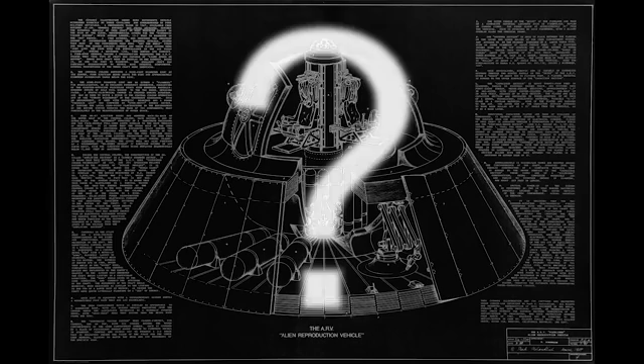So you're kind of left with a big question mark as to where's all this advanced technology going and what's it being used for. If there was somebody that had this sort of interstellar trade program going on with another civilization, that would be very interesting, but I can't understand why they would want to keep that quiet. It would seem like such a mind-expanding, enlightening thing for people to know about. Maybe we'd stop shooting at each other and start thinking about how can we get along with the people on stars or star systems that are around us. So it's hard to say.

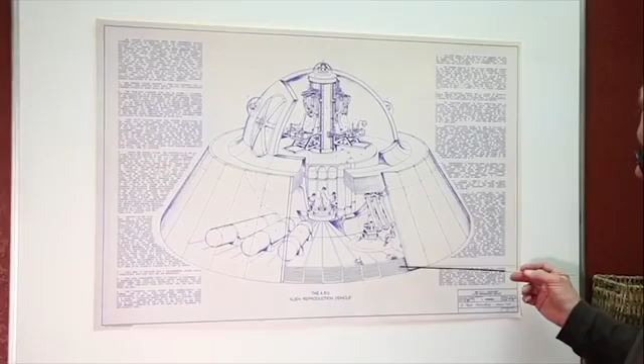Hello, I'm trying to look cool. Do I look cool?

Hey. Yep, this is me on camera. Okay.